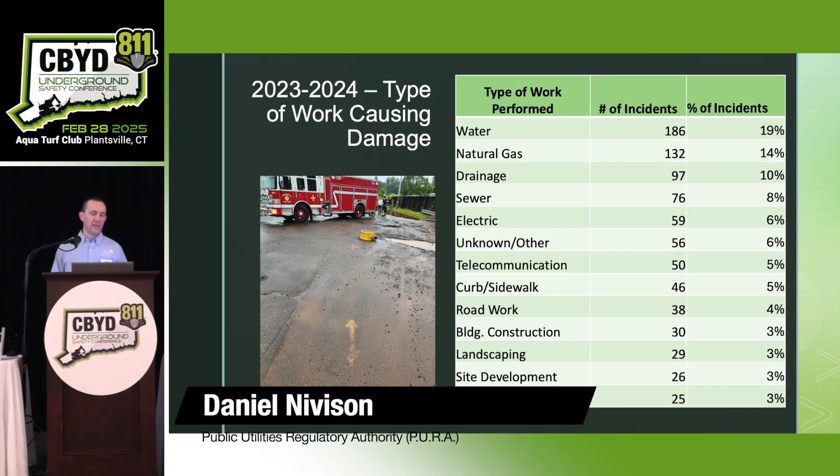One of the things that utilities report when they file the damage reports is the type of work being done when the damage happened. This was enlightening to me because I see most of the damages occur doing utility type of work: water work, natural gas work, drainage work, sewer work, and electric. So these are the types of jobs that are most at risk for having damages.

By show of hands, how many are in that type of realm doing water, natural gas, drainage, and sewage work? All right, okay, a good half the room. Okay, good to know.

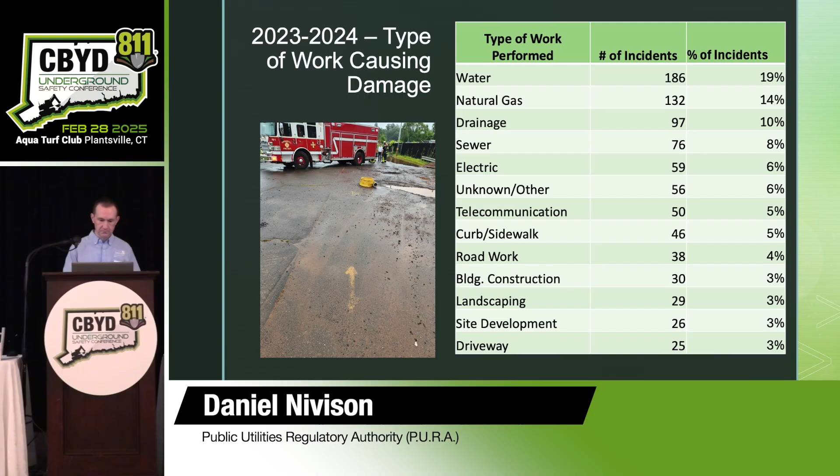Like I said, Connecticut has a very strong program. We like to compare state to state how people are doing. One way we do it is through PHMSA, a National Department of Transportation organization. Every gas company files an annual report listing how many damages they had and number of tickets, and we look at damage per 1,000 locates. Nationally, all gas companies together are about 2.5 damages per 1,000 locates. Broken out just for the eastern region, mostly the New England states, it's about 1.8 damages. Connecticut, we're at 1.2. So nationally and regionally, we are doing better than most, which I'm very proud of. But I still have 500 damages a year, and many are preventable. So that's why we're here today talking.

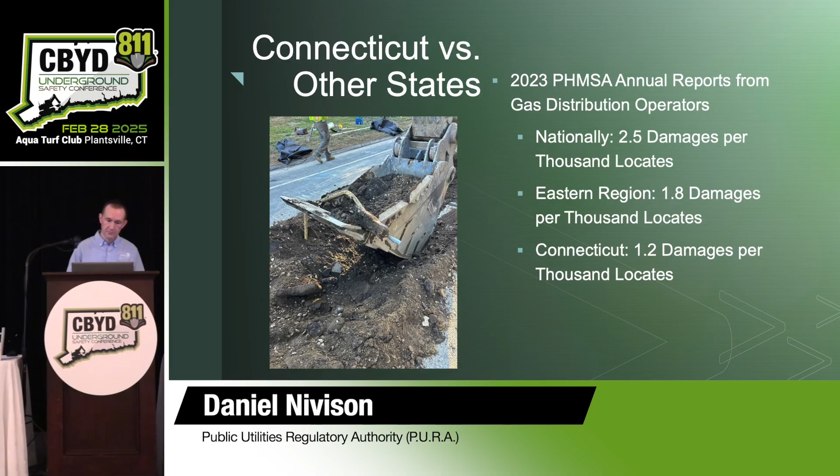Why is damage prevention so important, and why does Connecticut have such a strong program? This is one reason: the River restaurant in Derby. Unfortunately, sometimes good legislation comes out of a tragedy. December 6th, 1985, there was an explosion, collapse, and fire of a 4-story building. The River restaurant was on the ground floor of that building. There were 6 fatalities and 12 injuries.

Fortunately, the incident happened in the afternoon before the dinner crowd was there. The cause of the explosion was a cracked 3-inch cast iron gas main adjacent to the property that was damaged by adjacent sewer construction. After this incident, the NTSB got involved. Connecticut developed a really strong enforcement program, and this has led to where we are today, unfortunately. Knock on wood, this is the last fatal incident we've had from a call before digging damage strike in Connecticut. I always think that still can happen, the risk is out there, but this is the last one that's happened.

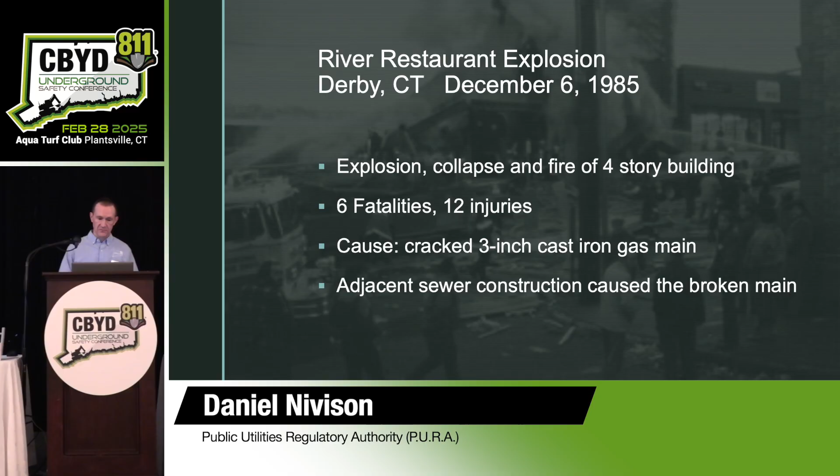So why is damage prevention so important? Damage can be fatal. If you strike an electric line or a gas line, you, somebody on your crew, or a member of the public could lose their life from an electrocution or an explosion. They can be very expensive. If your company's ever been involved in a large utility strike, there can be lawsuits, litigation, restitutions, and civil penalties. One utility company just had to pay out a two million dollar settlement for an individual who got electrocuted. He survived, but he was in a trench, he was a laborer, and they hit an unmarked electric line. He came in contact with something and suffered electrocution, survived, but was permanently injured. So we don't want to be there.

Damages can be very disruptive. Half of you have been on an incident or site where you've had a damage. Pretty much your job is at a standstill for the day as the utility company shows up and everything has to happen. It can slow down your production. It can be very disruptive. Don't let this be your job site. You don't want to have this be your work site.

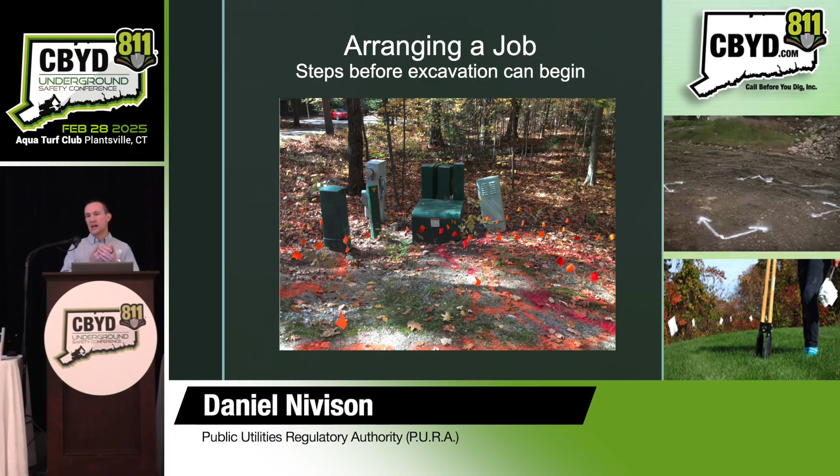Okay, next I want to turn it over to Steve. He's going to talk about the process for starting a job. Just as a background, the way we set up today's presentations is step by step through the whole process. So Steve's going to start with starting the job and then go through time-wise. So go ahead, Steve.

All right, so you've got a good background now on what Connecticut's Underground Utility Protection Program is all about. My portion of the program is to discuss arranging a job. But don't get me wrong, I'm not going to tell you where you should park your backhoe or put your backfill or anything else. What we're really talking about here is the steps you need to take before you put that shovel in the ground for the very first time. As you can see from this slide, it gives you a little look inside what we're going to talk about here, things like those markouts you see on the right-hand side.

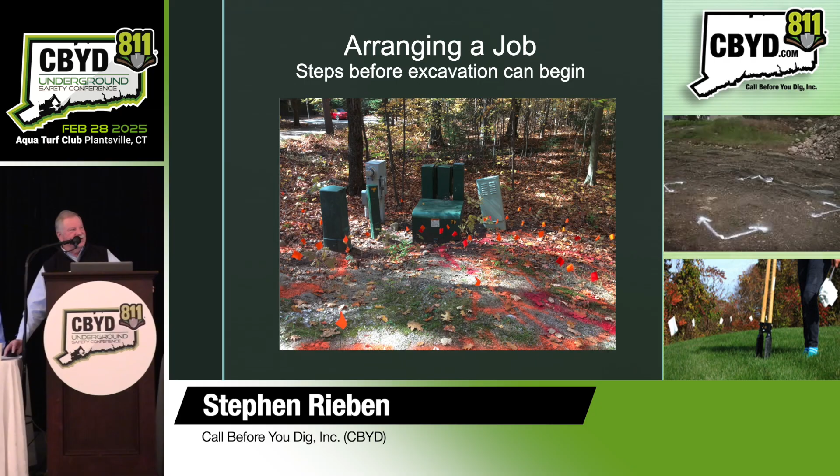Let's try this nifty little thing and see if this works. There we go. Hopefully you don't have to excavate in an area like this, guys, because I don't know how you would ever circumvent or navigate all of those underground facilities. You've also got an area of a pre-mark over here, which is going to be really the focus of what I want to talk about. And of course, there we are on a site that's already been flagged, and they're ready to go to work.

So why do we pre-mark? Well, number one, it's in the Connecticut state statute. It tells you that before you begin and actually make that call, to call before you dig, you need to go to your job site and mark out the area that you're intending to excavate. Why? Well, number one, and most obvious, the locators do have to know where you're working so that they can give you and focus on the area you're most concerned with.

I've already mentioned that it's in the state law, and just as a heads up, this is one of the areas that PURA is beginning to focus more attention on. You're probably well aware that you can be fined from PURA if you violate any of the call-before-you-dig laws. Well, this is one aspect of that law that has not been as enforced as it will be in the future. So if you're not in the habit of pre-marking your jobs, better start.

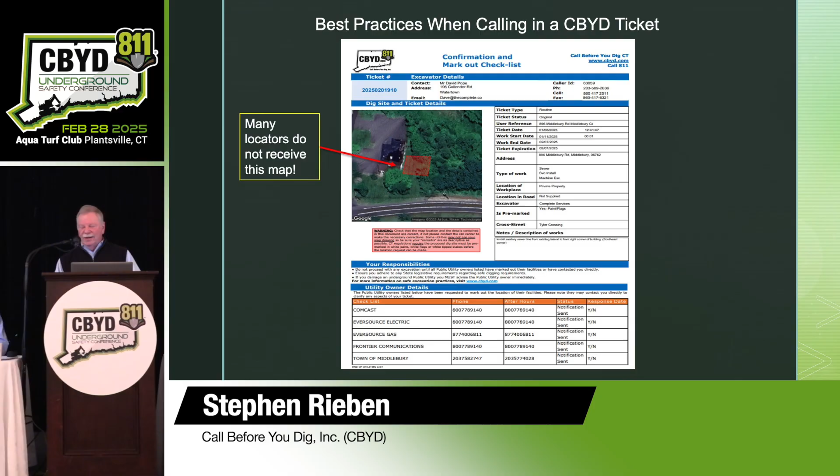Well, I mentioned some people in the field don't get that map. This is just an example of the basic information that everybody receives, regardless of how sophisticated your receiving equipment is, no matter how you manipulate data in your office. This here shows at least the text message that every owner and operator of underground facilities receives. You can see that it has the remarks area, again, very important. There's also an area that asks if you have, in fact, marked out your locate request.

The information that we ask for concerns the street address. We ask for that, for an intersecting street, any other detailed information as to how locators can access your work site. What I want to do is show you a few of the things that emphasize the need to truly mark in white paint your intended area of excavation.

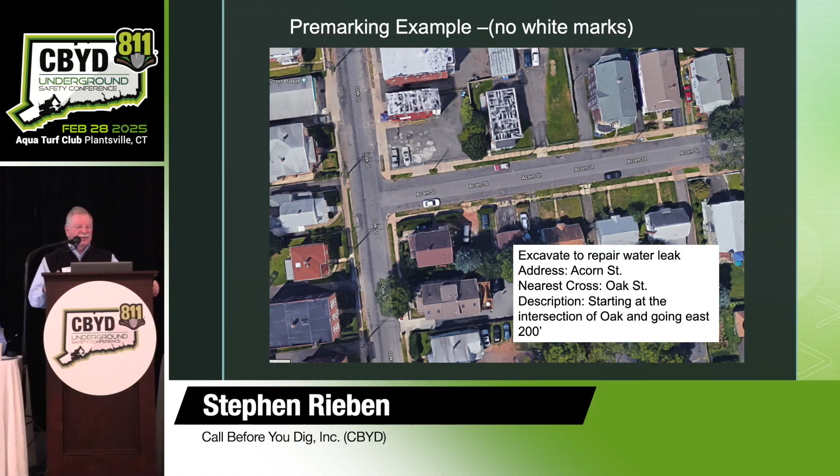Here we've got a ticket excerpt that says this excavator is going to repair a water leak. No specific address, because they've got to look for that leak. We know he's going to work on Acorn Street near Oak Street, and he's going to go down from the intersection some 200 feet. Now, if you're a utility locator and you come out with this information, first of all, you say, oh my God, look at the area he's got to cover. He doesn't know whether you're going to be digging in the center of the street, on one of the curb lines, or if in fact you need every single service marked out to each of the homes in this area. Leaves a lot of guesswork.

Even if you mark out minimally, it's a help. This demonstrates that if you put a few of the white call-before-you-dig marks on the street, at least you're giving them some guidance. And I have to tell you that one of the most important things for pre-marking is that it allows a locator to see where you're working. He can focus his marks there, get that job done, and move on to his next scheduled job. That's important for all of us, because if we allow the locator to be more efficient in his work, he can get more jobs done per day. That means less downtime for you, and it means markouts will be done on time when you expect them.

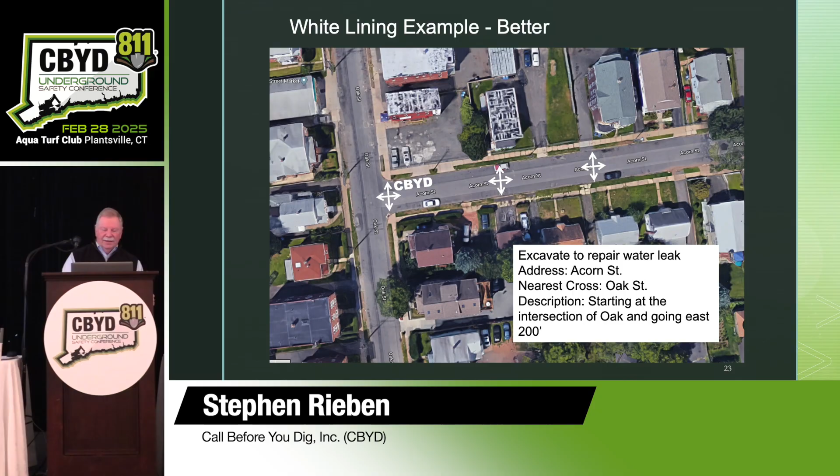This markout example is even better. We're still dealing with the same location, but at least here you see the white lines that really encircle the entire area that this excavator is interested in having marked out. The locator can see that it's work that may go as far as the curb line and up onto the sidewalk. It certainly includes the full intersection here of the two streets he's named on his ticket, and it gives him a much better idea of where it is he needs to mark out. And there you see it. That's really kind of the best for a long job site like this water leak repair.

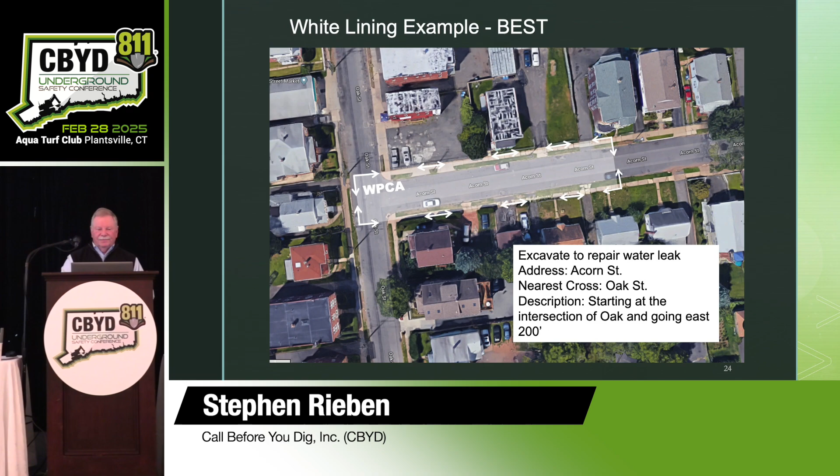Here again is another pre-mark. You can see the white outlines of the job, the extent across the street, all the way down to this point. One thing we do like to see is here, the excavator has said, okay, this is my call before you dig job I'm marking out. Wouldn't it be better if you put an abbreviation for your company name? It would certainly tell people that this is your job so it's not confused with somebody else who might be working in the area. We encourage you to do that. Use an abbreviation of your company name so it's very clear as to who this job is being marked out for.

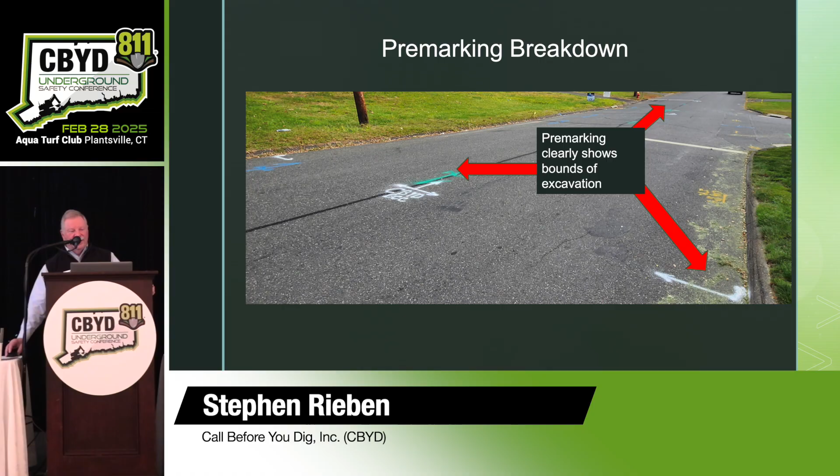Again, you can see the boundaries of where the excavator intends to work. Even more importantly, within that area, you can see the utility lines being marked, both as they enter into his work site and also coming out. With the marks that should be made, and you see more farther down the street here, the excavator knows exactly where he's got to either not dig or at least be very careful.

Here's a few other examples of pre-marking. This one is a catch basin repair, and you can very clearly see the white outline of where the excavator let people know he was concerned. You can see all of the other utility marks around that catch basin.

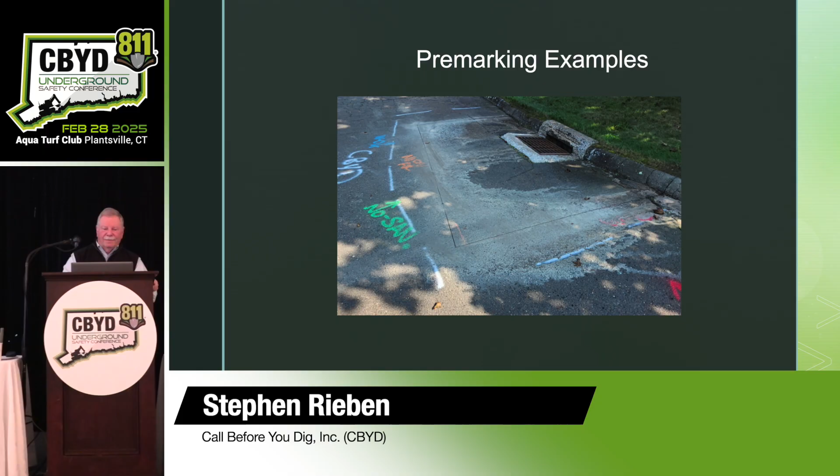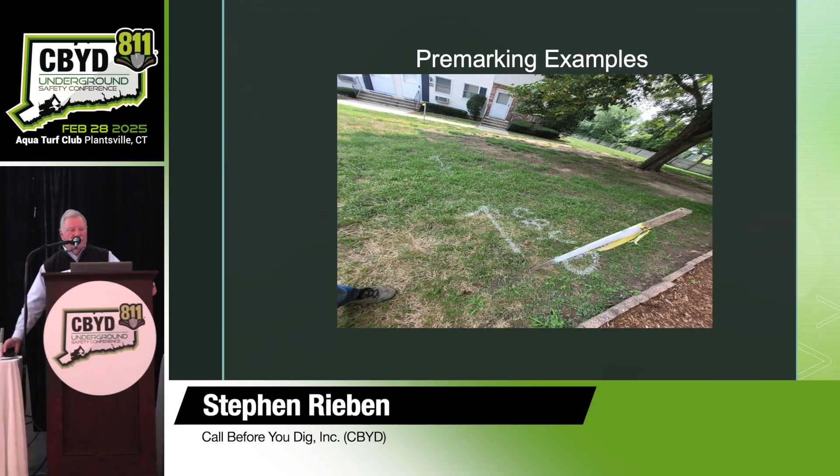So what do we get out of pre-marking? Well, number one, it's a great way to describe your location. It really increases the communication with the locators. And how do you do that? Well, again, it's a combination of the picture you draw on your ticket, and very definitely it depends on the description that you put into the remarks of those tickets that you process. There's less confusion going on out at the job site. Then of course we're going to do what Dan said is the goal, which is avoid any damages to underground facilities.

You might see 'no conflict' or similar things written out there as well. The utilities can also contact you via phone or email to let you know the status of the job.

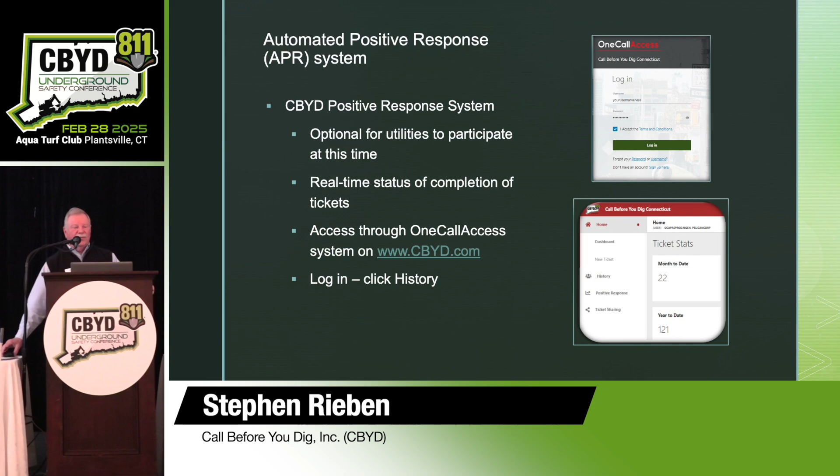What is this automated positive response? When you log in to your account at Call Before You Dig, you go to your original web page site, you can log in and look at your history. When you click on history, there's an option allowing you to look at any tickets you've placed in the Call Before You Dig system.

The idea is that if all the utilities respond to your work site request, you can go to one place and find out what they've done and what descriptions they've given as to what to expect once you go back out to that job site.

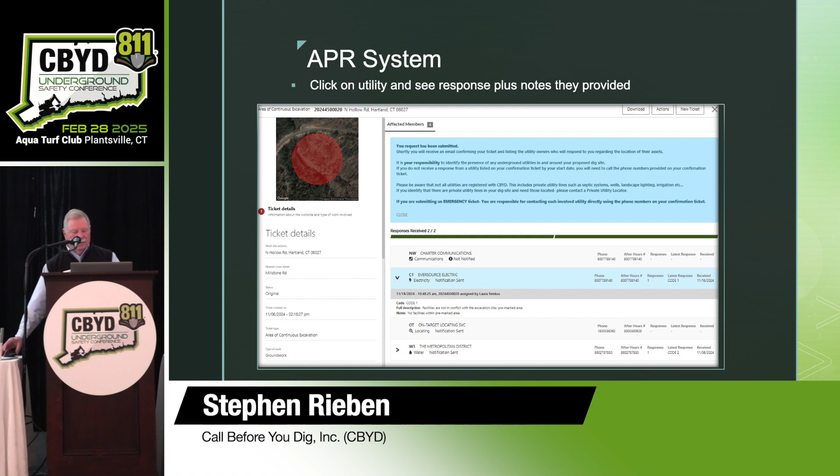One feature of the positive response system is that once all utilities reply to your ticket, you get an email message telling you everyone has responded, so you can look at that, find out the details, and proceed with your job.

There's always questions about whether, as a general contractor with subs working under you, those companies can work under your ticket. In some cases, yes. One thing we really ask is that you make sure the other company's name is written on your ticket, and hopefully provide some contact information for them. The bottom line, though, is that if you're working a job site with your own equipment and your own people — your guy in the backhoe — go ahead and make that call on your own. Don't depend on some other company having made that call and gotten the markout.